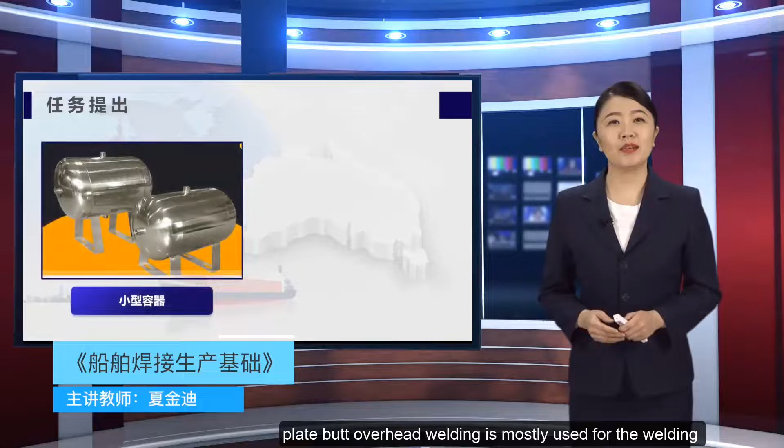In actual production, plate butt overhead welding is mostly used for the welding production of longitudinal and circumferential overhead welding seams for small vessels or small diameter pipelines. This welding method can be welded outside the vessel and can also form welds inside. Let's look at this picture.

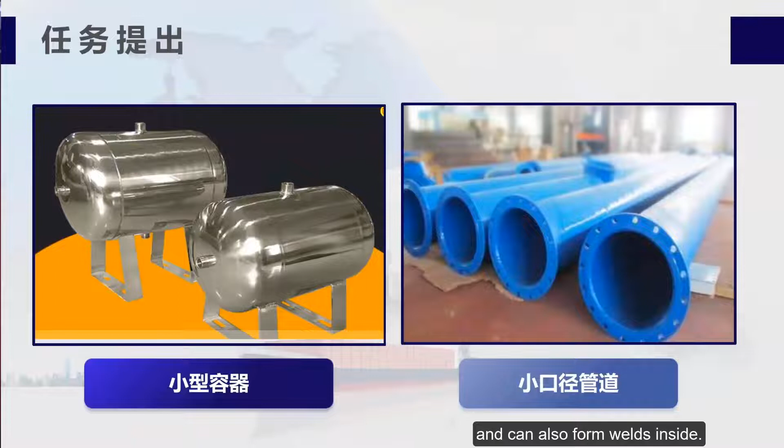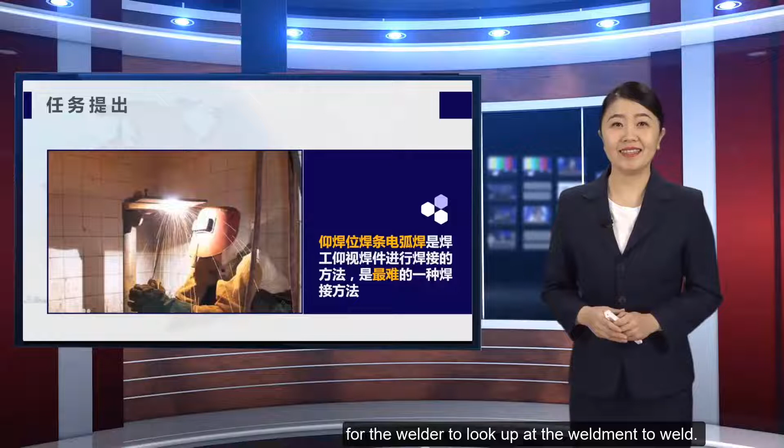The arc welding of the electrode at the overhead position is a method for the welder to look up at the weldment to weld. It can be said that it is the most difficult welding method, because in the whole welding process, the molten pool is suspended under the weldment.

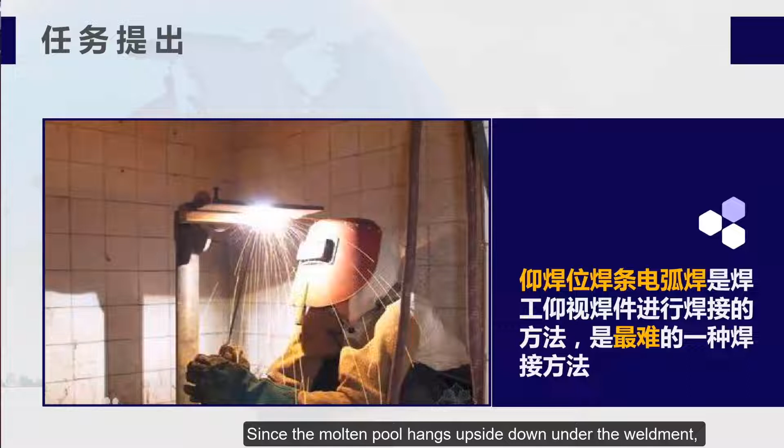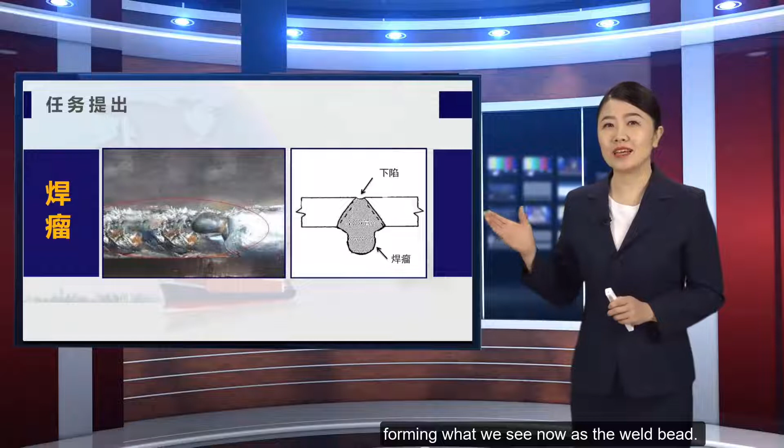Since the molten pool hangs upside down under the weldment, the molten metal droplets and molten metal in the molten pool tend to flow down under the action of gravity, forming what we see now as the weld bead. Moreover, the back weld is also very prone to sag, which affects the weld formation.

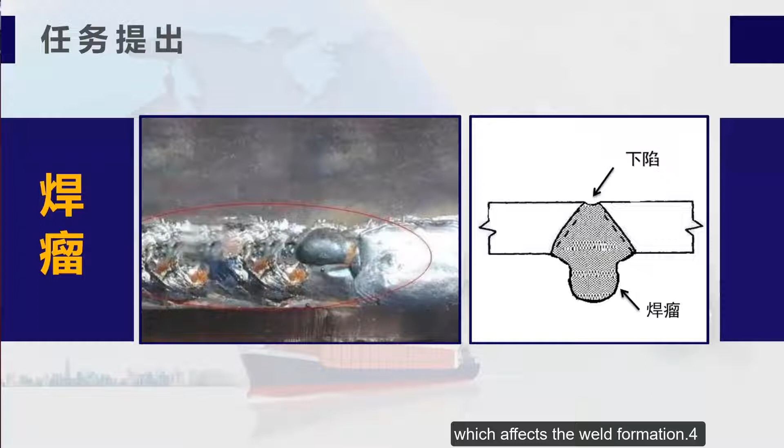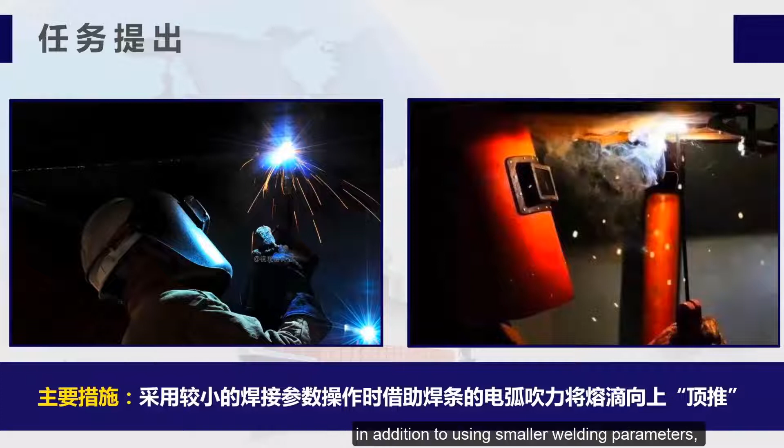In order to control the size and temperature of the molten pool, reduce and prevent the liquid metal from flowing down, in addition to using smaller welding parameters, the arc blowing force of the electrode should be used to push the molten drop upwards.

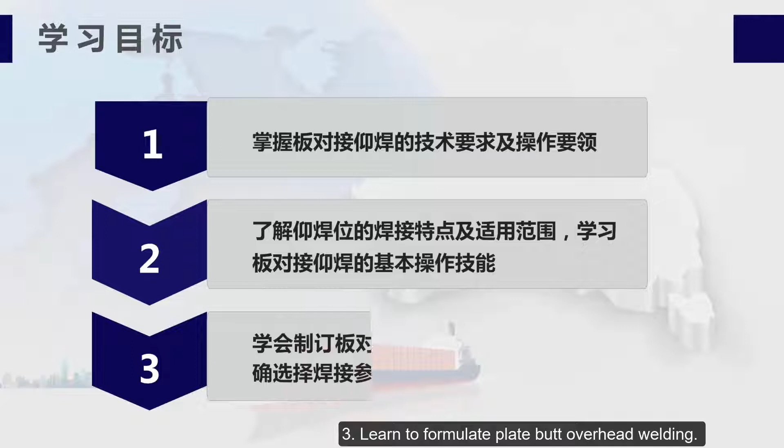Our learning goals in this class are: 2. Understand the welding characteristics and application scope of the overhead welding position, and learn the basic operation skills of plate butt overhead welding. 1. Master the technical requirements and operation essentials of plate butt overhead welding. 3. Learn to formulate plate butt overhead welding assembly welding scheme. Can correctly select welding parameters.

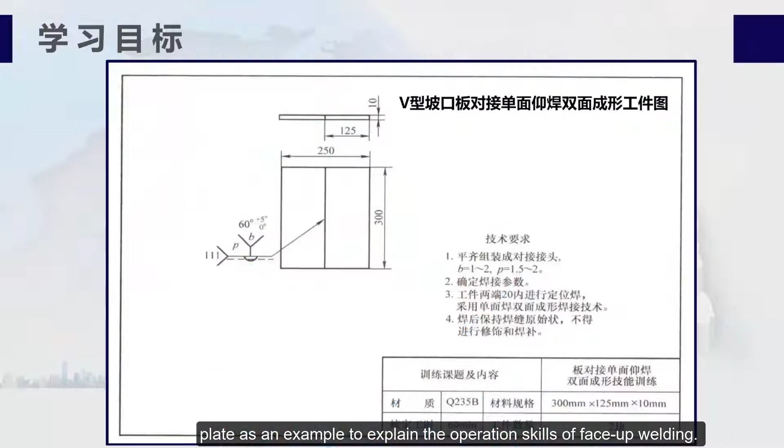Below, we take the thickness of 10 mm and the material of Q235B steel plate as an example to explain the operation skills of overhead welding. Please read the workpiece pattern, complete the welding task, and meet the technical requirements of the workpiece pattern.

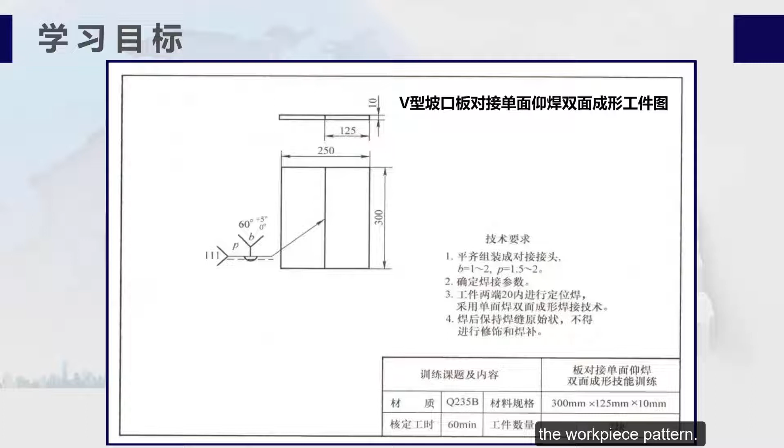Our welding operation is divided into 3 layers: base layer, filler layer and cover layer. Please follow along with my video to learn.

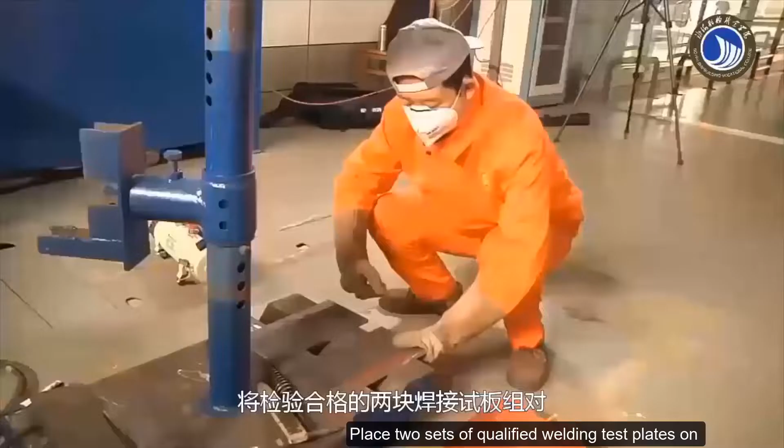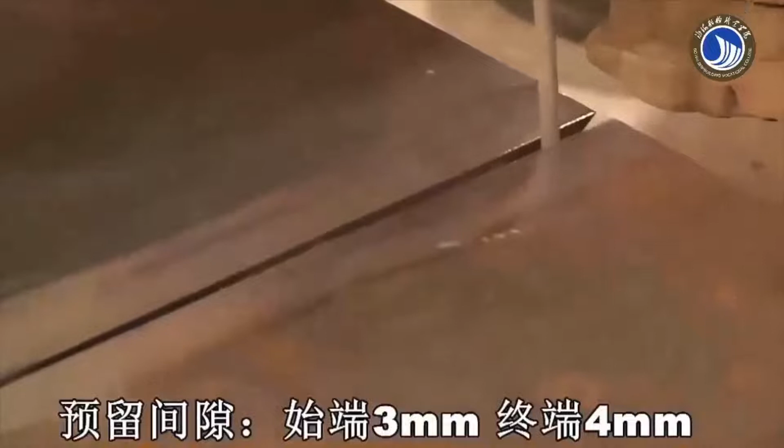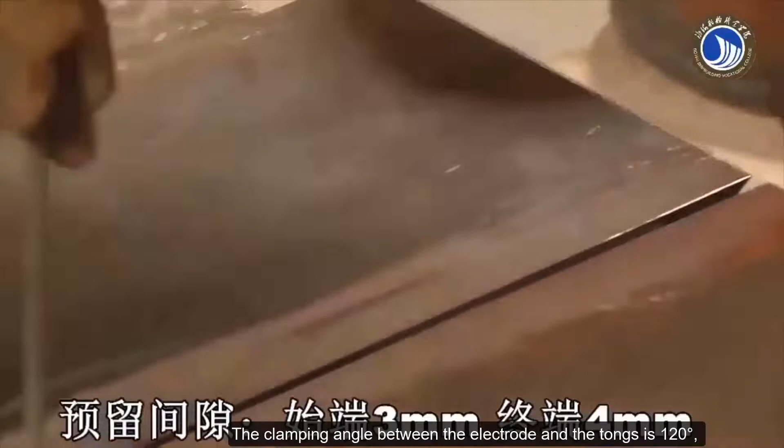1. Assembly and welding. Place 2 sets of qualified welding test plates on the welding tooling assembly platform, and keep the 2 test plates at the same level. Use both ends of the electrode to assemble the groove gap. The assembly gap of the initial welding end is 3 mm, and the final welding end is 4 mm. The clamping angle between the electrode and the tongs is 120 degrees.

The electrode model is E5015. The diameter is 3.2 mm, and the welding current is 110 to 120 amperes.

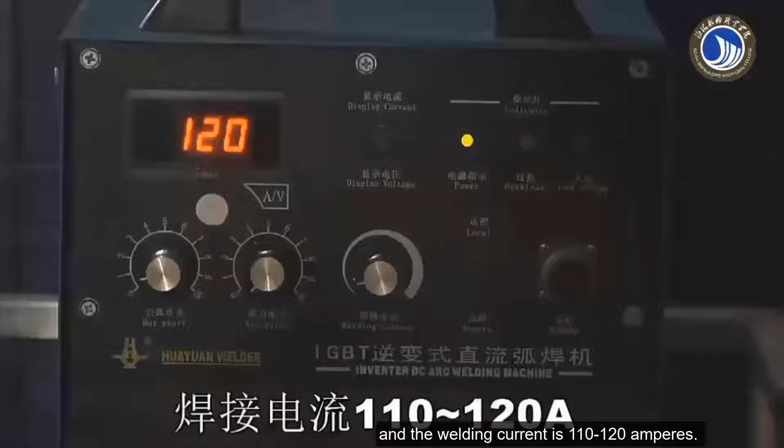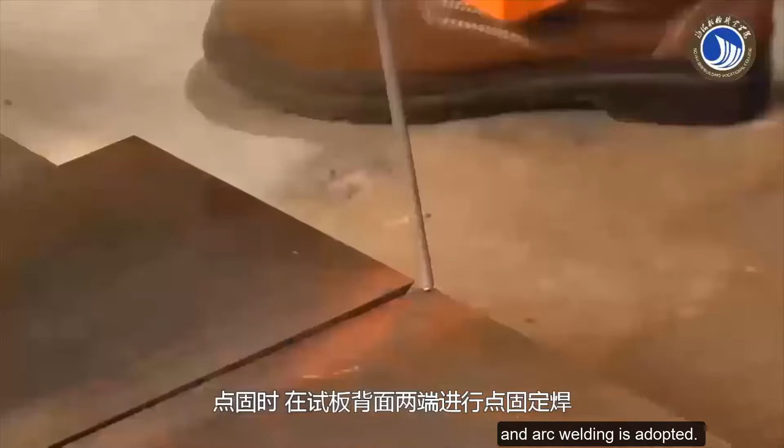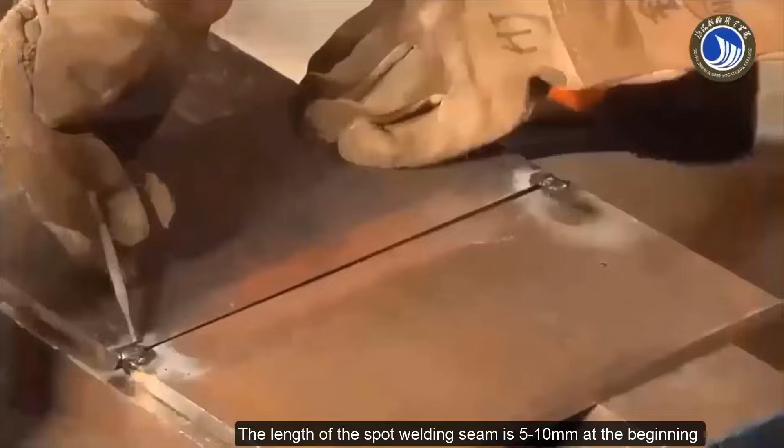When spot fixing welding is performed on both ends of the back of the test plate, arc welding is adopted. The spot fixing weld and the edge of the groove must be fully fused. The length of the spot welding seam is 5 to 10 mm at the beginning and 10 to 15 mm at the end.

After the spot welding is completed, use a slag hammer and a wire brush to clean the surface of the tack weld to expose the metallic luster.

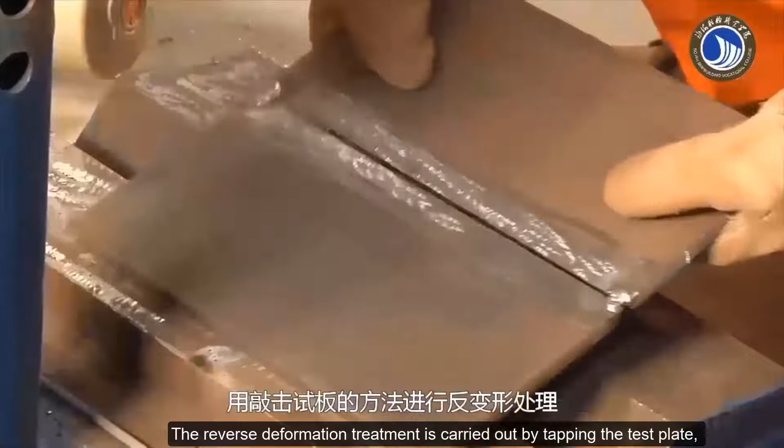The reverse deformation treatment is carried out by tapping the test plate, and the angle of the reverse deformation is 7 to 8 degrees. Use a welding rod or ruler to lay flat on the test plate, and measure the distance between it and the test plate to be 10 to 15 mm to ensure the anti-deformation of the test plate.

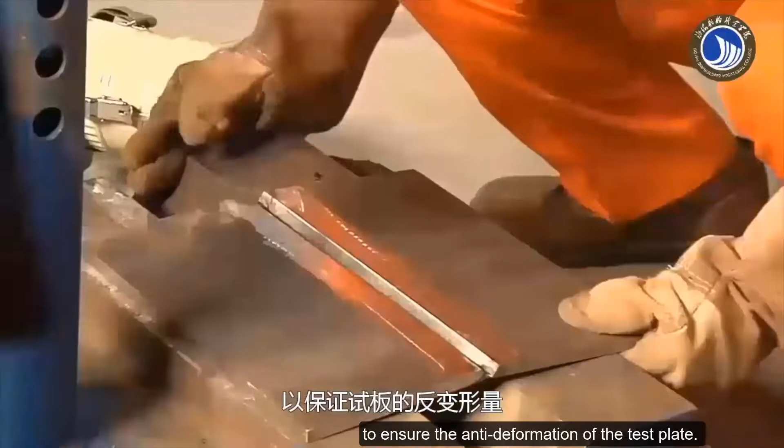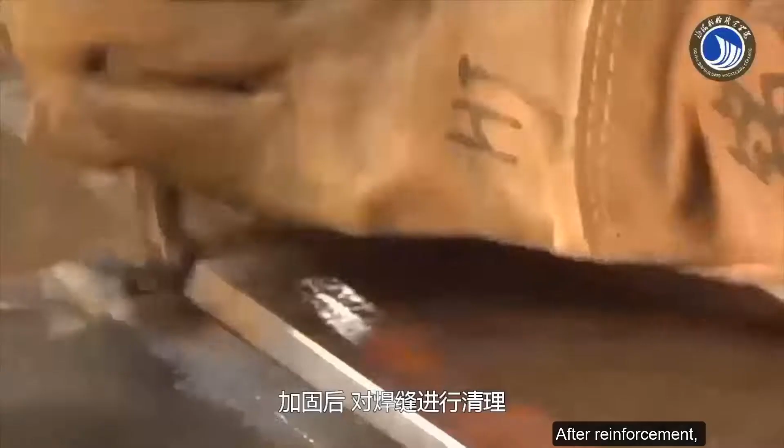After the reverse deformation is completed, the point-fixed weld is reinforced again on the inside of the groove. After reinforcement, the welds are cleaned, and finally the assembly points are ground and formed to facilitate joints. Check the reserved gap.

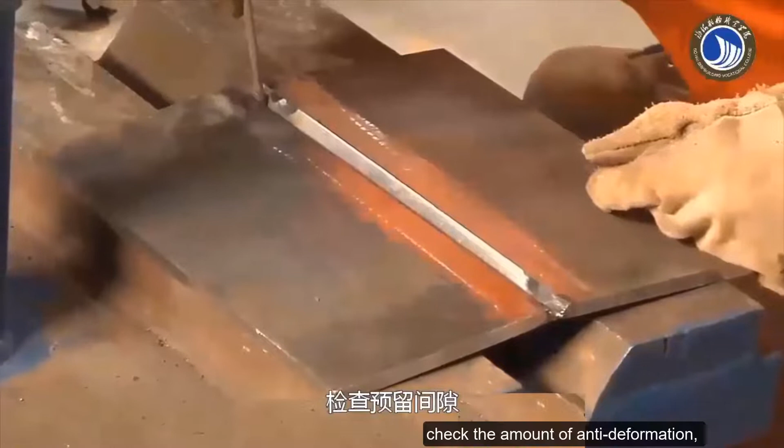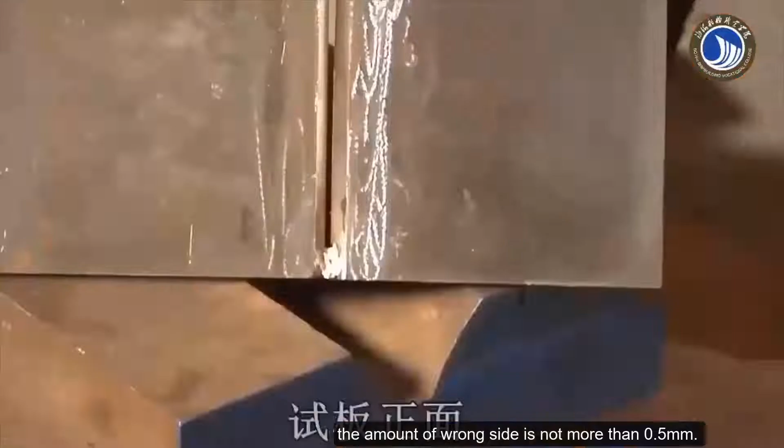Check the amount of anti-deformation, and the amount of anti-deformation is required to be 7 to 8 degrees. Check the amount of wrong side. The amount of wrong side is not more than 0.5 millimeters. This is the front side of the test board and the back side of the test board that have passed the inspection after assembly.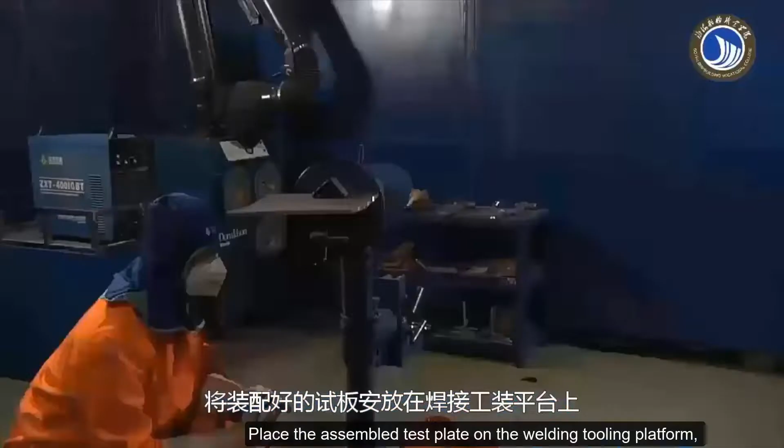2. Bottom layer welding. Place the assembled test plate on the welding tooling platform, and the height shall be subject to the operating height of the operator to ensure that the welding seam is in the overhead welding position. The welding current is 115 to 125 amperes.

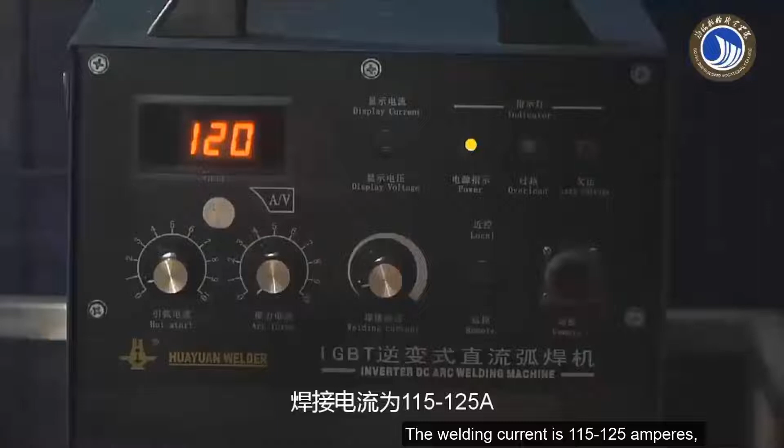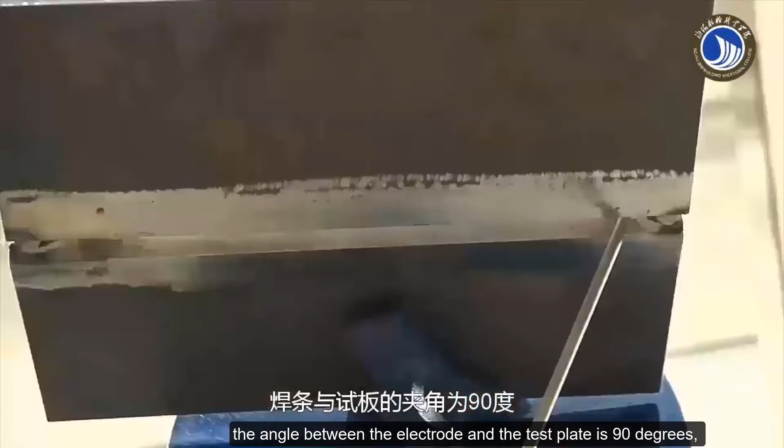The angle between the electrode and the tongs is 150 to 180 degrees. The angle between the electrode and the test plate is 90 degrees, and the direction of the molten pool is 90 to 110 degrees. Start the arc at the positioning point.

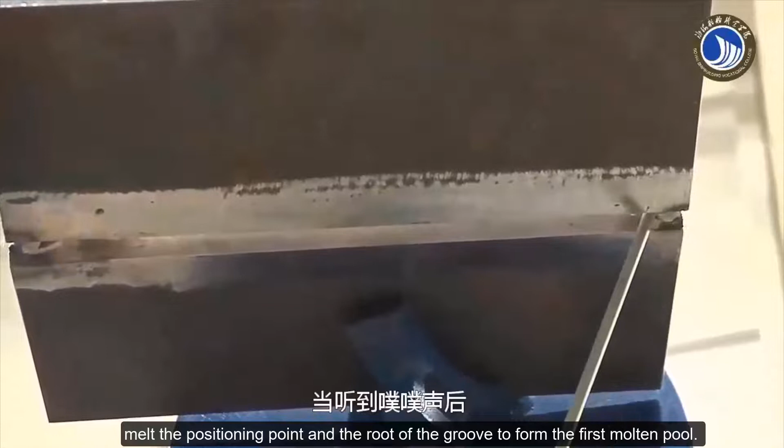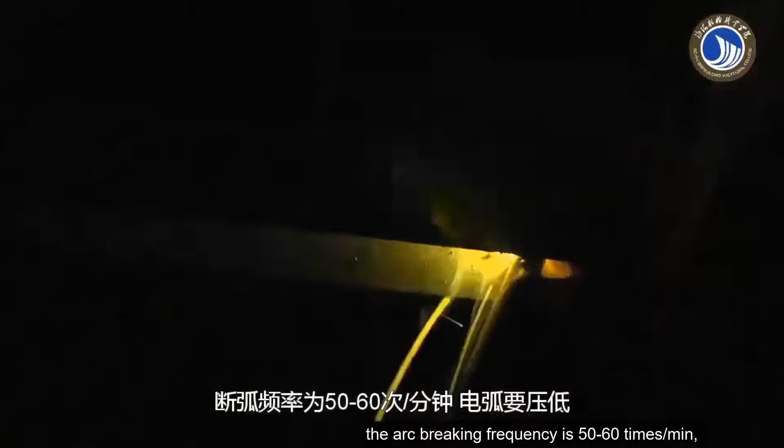After igniting the arc, melt the positioning point and the root of the groove to form the first molten pool welding. When the arc breaking method is used for welding, the arc breaking frequency is 50 to 60 times per minute. The arc should be lowered, and the electrode should go to the top of the groove root.

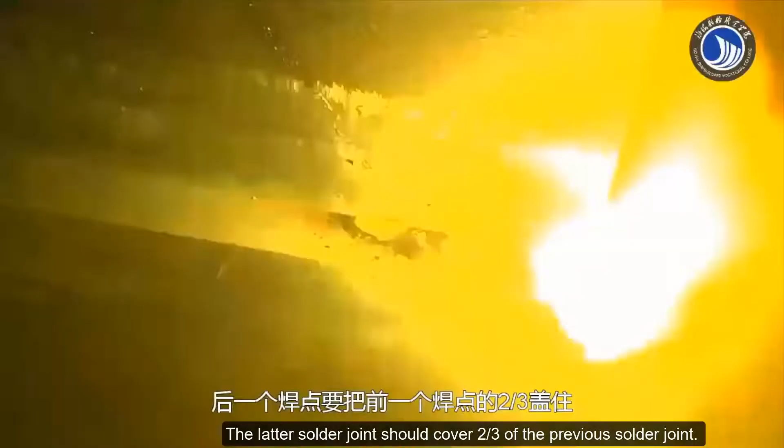Pay attention to observe the size of the molten pool and the molten hole. The latter solder joint should cover 2/3 of the previous solder joint. In this way, a weld is formed.

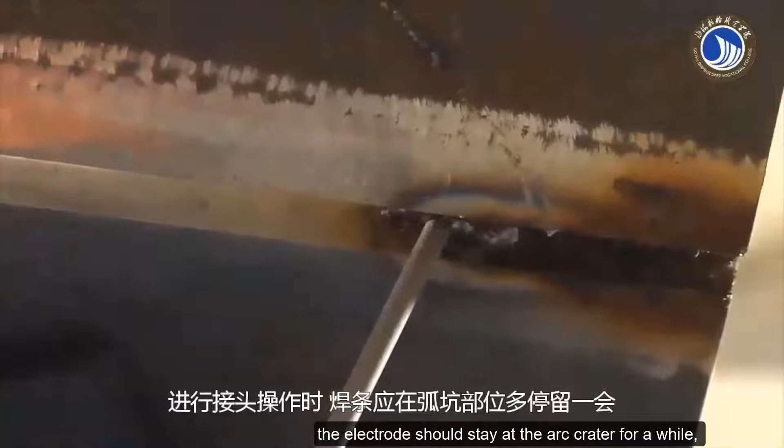When the joint operation is performed, the electrode should stay at the arc crater for a while, and then press the electrode to the root of the groove. When the sound of pop is heard, it proves that the back of the groove has penetrated, and it can be transferred to normal welding.

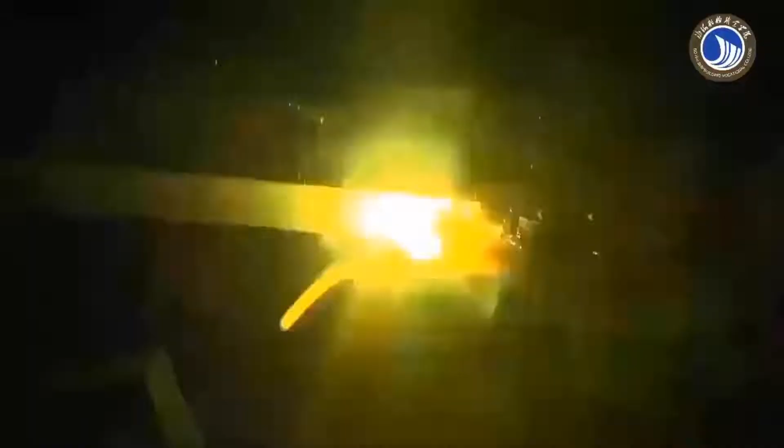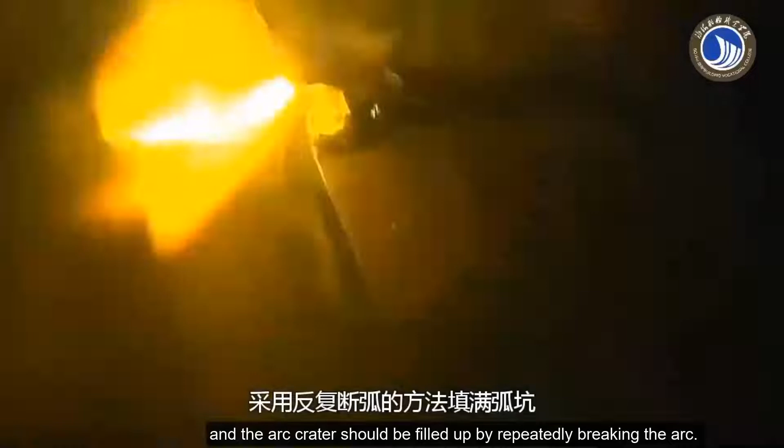When welding is received at the tail position, the arc should be depressed, and the arc crater should be filled up by repeatedly breaking the arc. After welding, clean the weld bead with a slag hammer and wire brush. This is the front and back of the weld completed after backing welding.

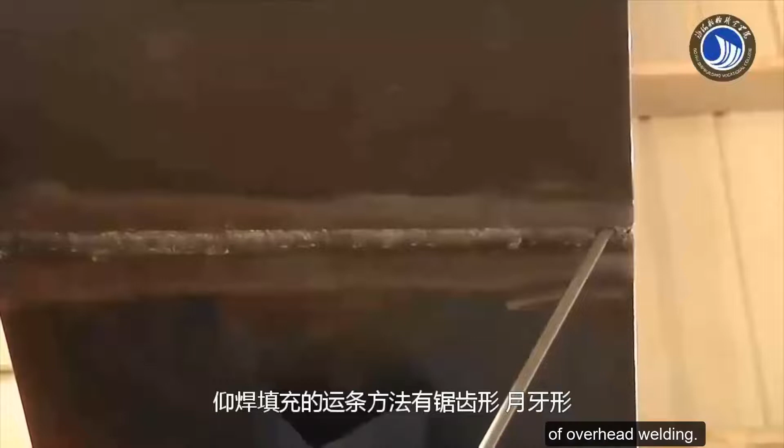3. Filling layer welding. The welding current is 120 to 130 amperes, and the angle between the electrode and the welding tongs is 150 to 180 degrees. There are zigzag and crescent shapes for the transportation method of overhead welding. When filling the first layer of weld bead, the electrode swings from side to side and stops on both sides of the groove to ensure sufficient fusion.

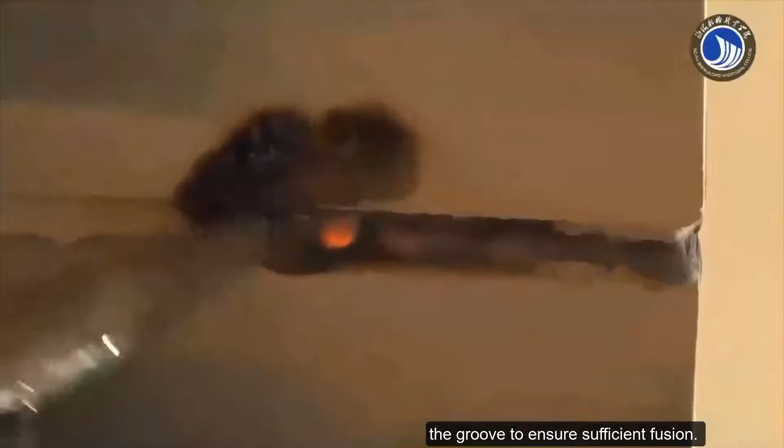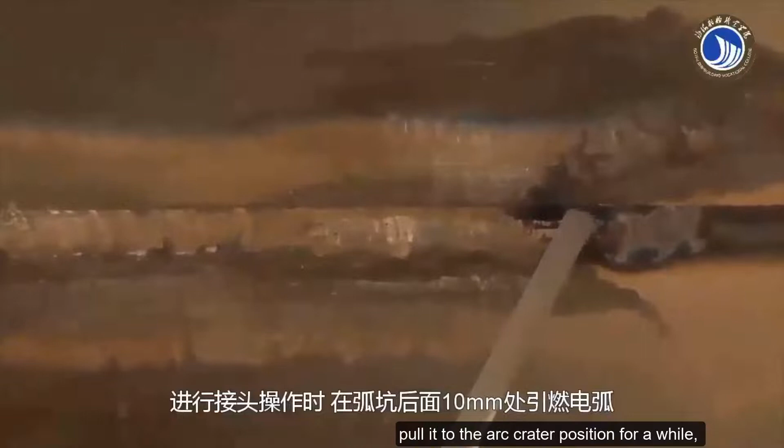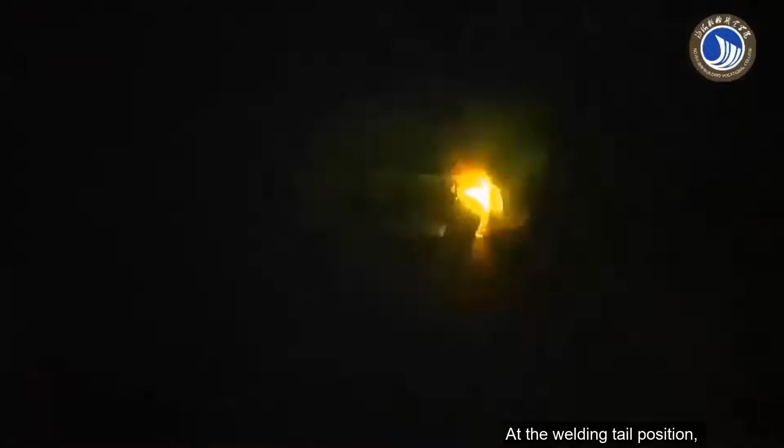When performing the joint operation, ignite the arc at 10 mm behind the arc crater, pull it to the arc crater position for a while, and then transfer to normal welding after filling the arc crater. At the welding tail position, the arc should be lowered, and the arc crater should be filled up by repeated arc breaking.

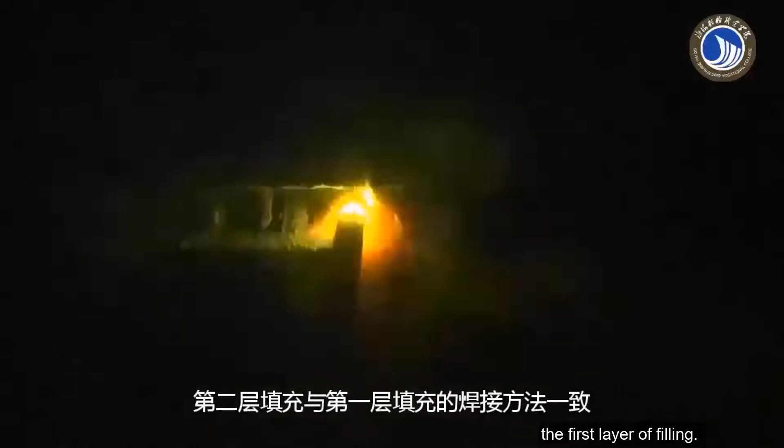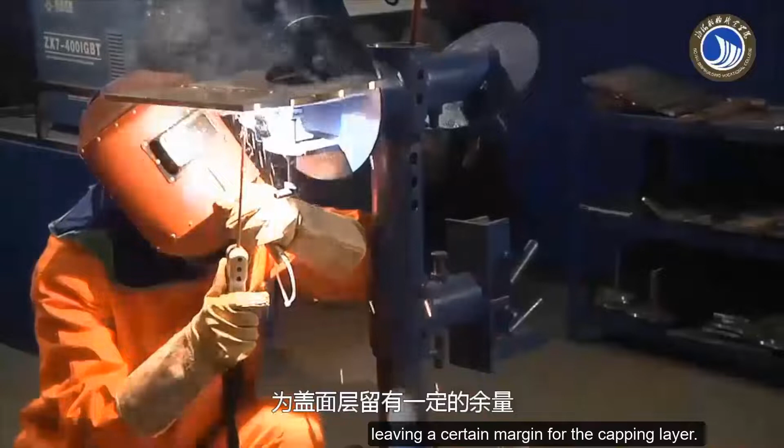The welding method of the second layer of filling is the same as that of the first layer of filling. Note that the filling layer must not be higher than the base metal, 1 to 2 mm from the surface of the steel plate, leaving a certain margin for the capping layer. After the filler layer is welded, clean the weld with a slag hammer and wire brush. This is the weld after filler welding is complete.

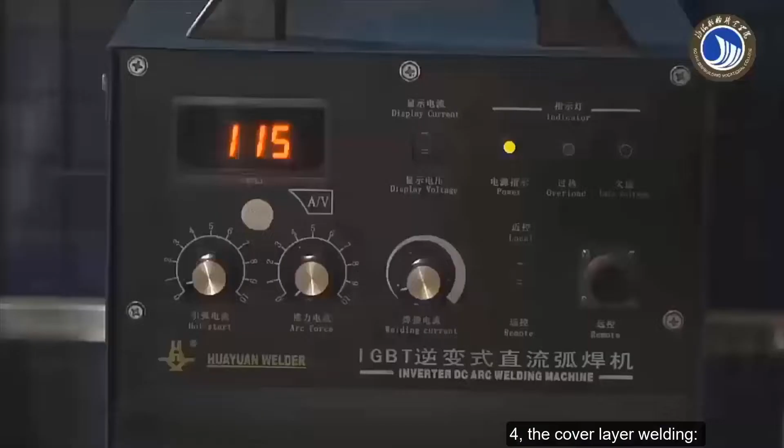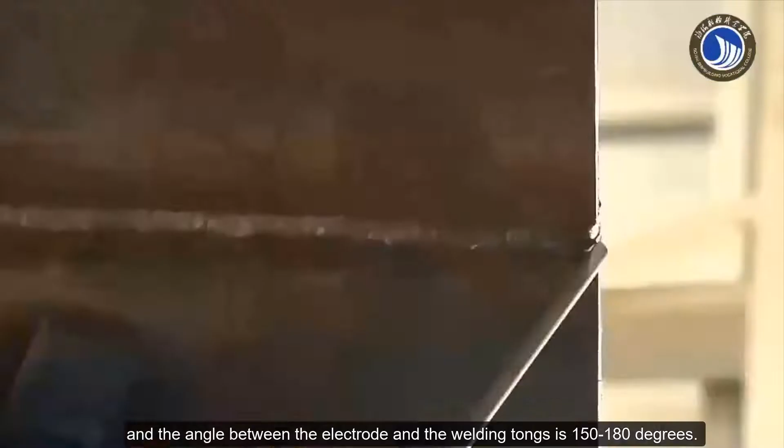4. The cover layer welding. The welding current is 110 to 120 amperes, and the angle between the electrode and the welding tongs is 150 to 180 degrees. Use short arc and zigzag strip method in cover welding. Pay attention to sufficient fusion on both sides of the groove to ensure uniform welding speed.

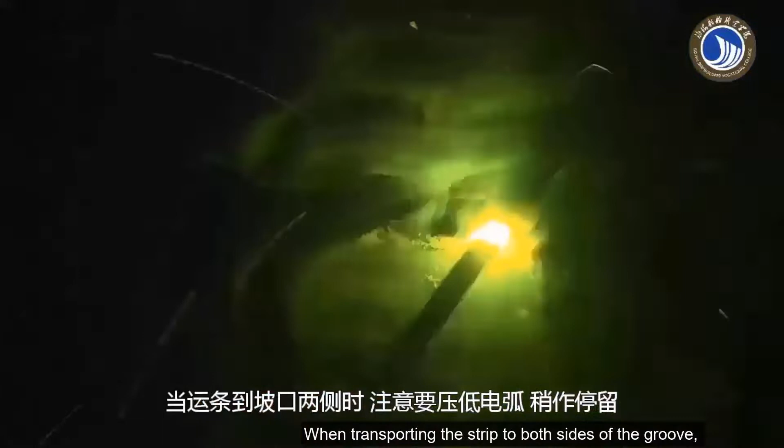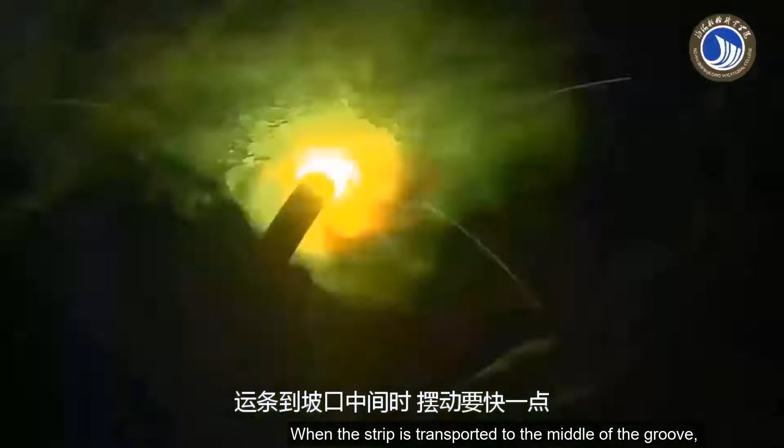When transporting the strip to both sides of the groove, be careful to lower the arc and stop for a while. The edge of the molten pool just melts to the edge of the groove. When the strip is transported to the middle of the groove, the swing should be faster to prevent the weld bead from being super high in the middle of the weld.

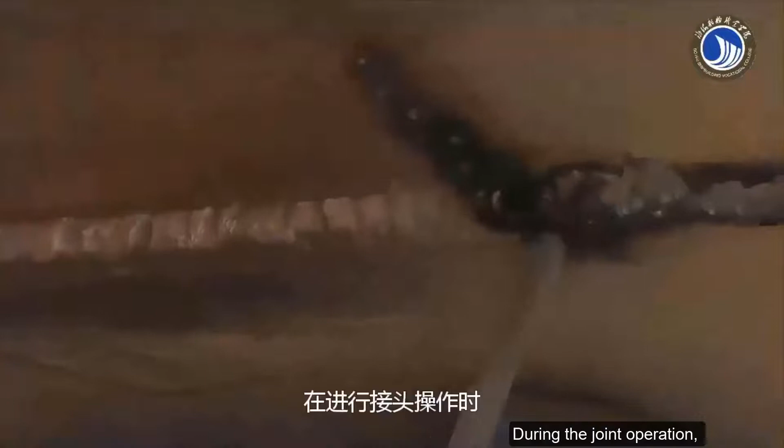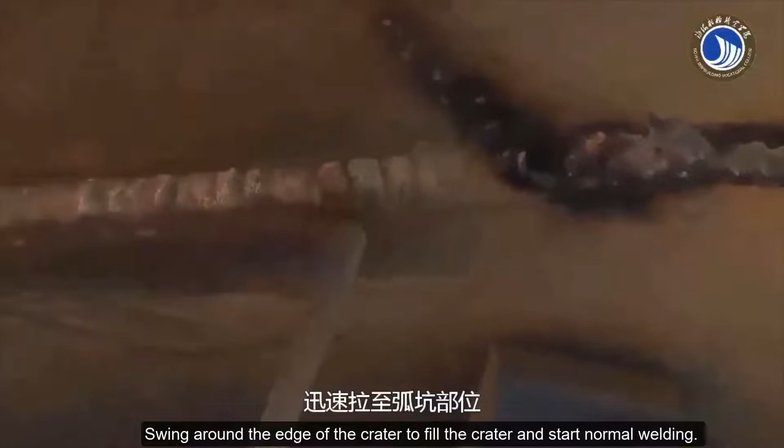During the joint operation, the electrode ignites the arc from about 10 mm in front of the crater and is quickly pulled to the crater. Swing around the edge of the crater to fill the crater and start normal welding.

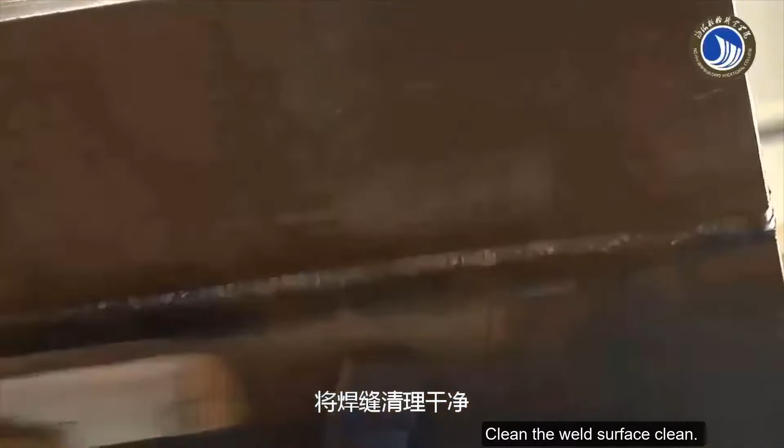When the welding reaches the end position, the arc should be lowered, and the arc crater should be filled by repeatedly breaking the arc. Clean the weld surface clean. This is the front side of the weld seam and the back side of the weld seam after the plate butt welding is completed.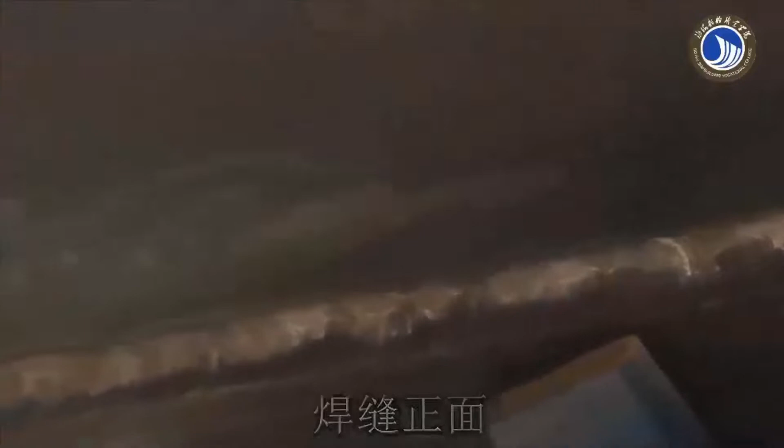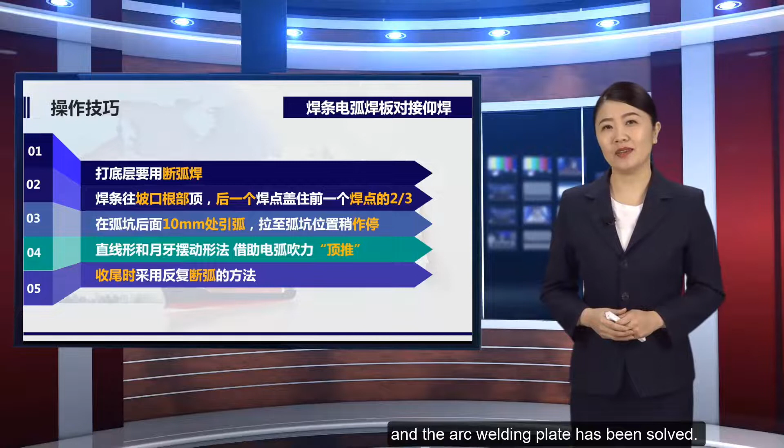Through the operation video just now, the main problem of the butt welding of the welding rod and the arc welding plate has been solved. The main operation skills are: 1. Arc breaking welding is required for the bottom layer. You must hear the pop sound before you can switch to the normal welding to prevent subsidence.

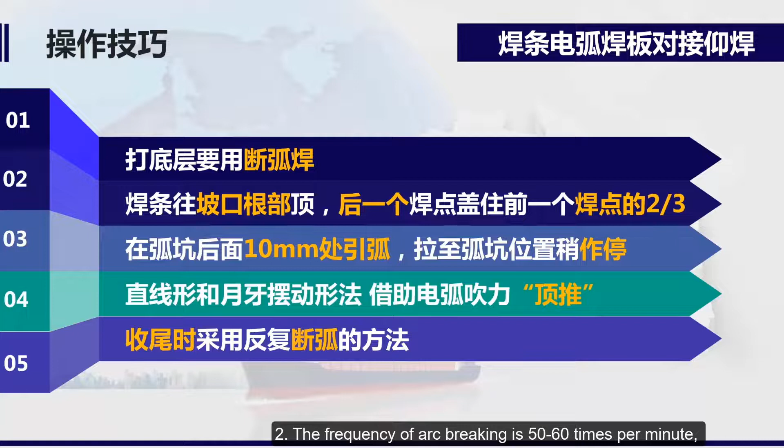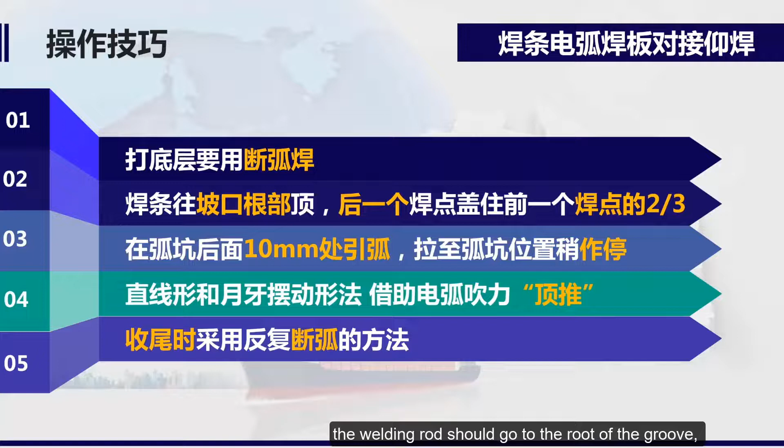2. The frequency of arc breaking is 50 to 60 times per minute. The arc should be lowered. The welding rod should go to the root of the groove, and the latter welding point should cover 2/3 of the previous welding point, a welding seam.

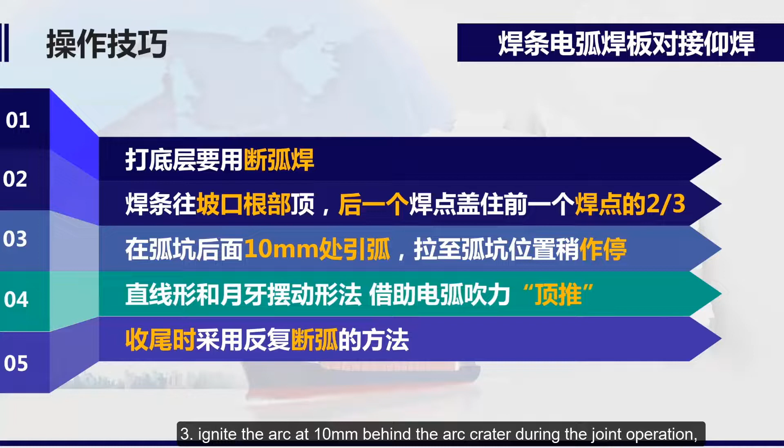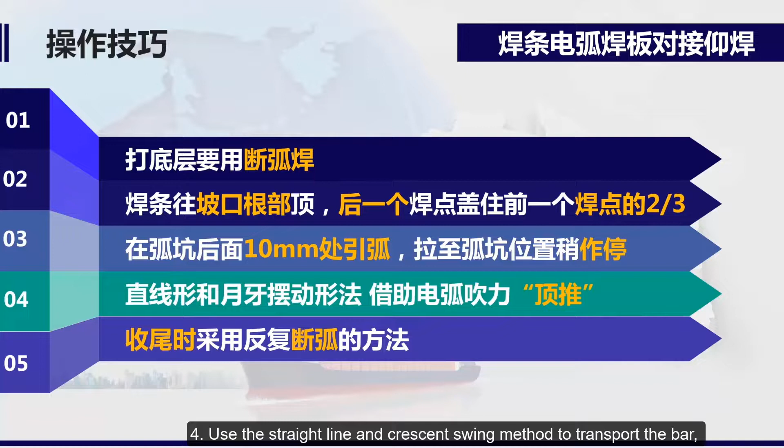3. Ignite the arc at 10 mm behind the arc crater during the joint operation, and pull it to the arc crater for a short stop. 4. Use the straight line and crescent swing method to transport the bar, and the arc blowing force of the electrode should be used to push.

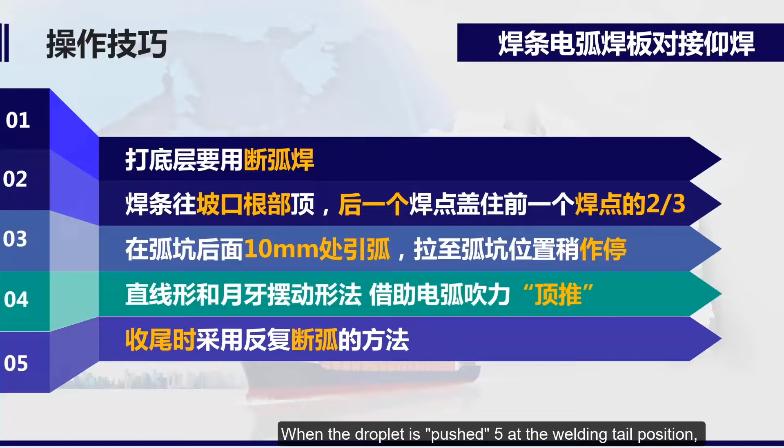When the droplet is pushed at the welding tail position, the arc should be depressed, and the arc crater should be filled by the method of repeated arc breaking. That's all for this class. Thank you for watching.